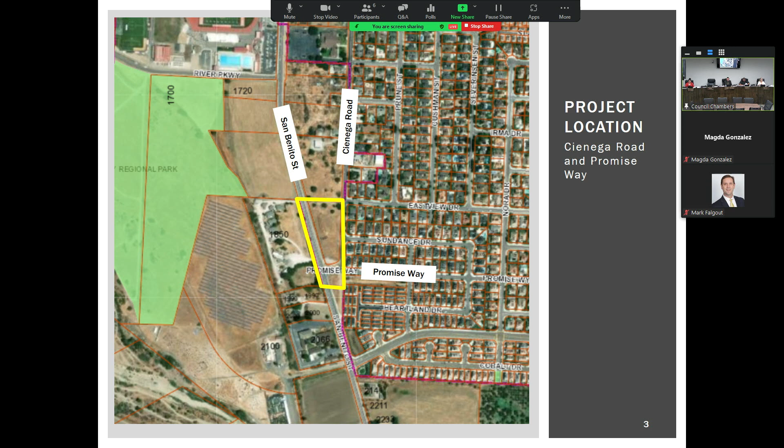To give you a little bit of background, this project has been under review for quite some time. On July 26, 2022, the applicant did submit an application for review. What happens when an applicant submits their application is that the planning division then routes it to everyone within the development review committee. We meet with the development review committee and gather everyone's comments.

There could be design comments at this point in an initial review, though probably not because we're missing some information. But what we do is wrap together what we have and distribute it to the applicant as one complete package. We did that on August 24th. As required by the Permit Streamlining Act, we are required to give them a list of everything they need to give us within that 30-day period for completeness.

The applicant then resubmitted in September. We then sent them comments in October. The applicant then submitted on June 8th and it was deemed complete. And the way that the Permit Streamlining Act works and the way that the Subdivision Map Act works is that once a project is deemed complete, we then have to move the project forward.

We had to make a CEQA determination within 30 days of completeness. That was done. And then once that determination is made, the Subdivision Map Act requires us to bring the project before the decision-making body, in this case, the Planning Commission, for a decision on the project. So that's how we kind of got where we are tonight.

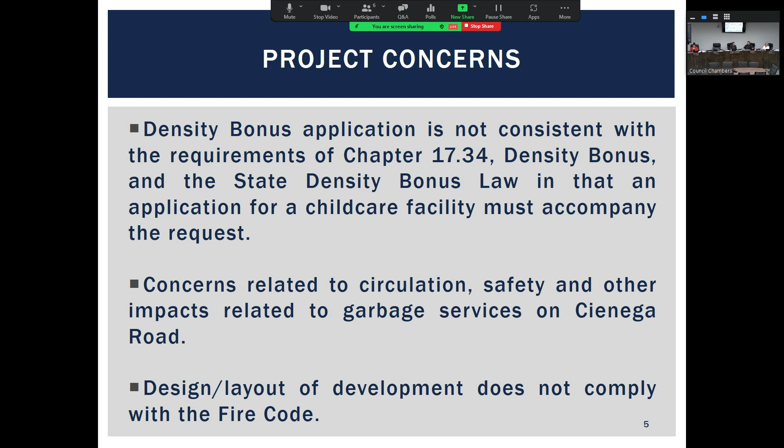The way that the Housing Accountability Act works is that staff and a city is limited on ways in which you can deny a residential development. Back in the day, you could deny it because the design wasn't attractive enough or whatever reason you had, but now it's very specific. It has to be due to safety or it doesn't meet the code.

With regards to the density bonus, in the last submittal, we had two options submitted. That was because the preferred option has always been option A, and that includes a childcare facility, and staff has had comments on that from the beginning. So in the last round, there are two options. I'm going to talk about both of them just so we can fully discuss their project.

As far as the density bonus goes, they're proposing to restrict one unit for very low income, which is 5% of the total number of units. And because of that, they qualify for a density bonus. So as part of that density bonus, they are requesting a waiver of development standards such as setbacks and lot coverage, which they're entitled to. They then get to have a density bonus of units.

And what they're requesting is the maximum, so that's 4 units. And again, that's allowed by the density bonus chapter as well as state density bonus law, so they are entitled to that. So that increases their density on the site up to 22 units. And then they're eligible for the parking requirements under the density bonus.

With regards to option B, it meets all the requirements of the state density bonus law and our chapter 17.34, so there's no density bonus concerns with option B. It meets all the requirements.

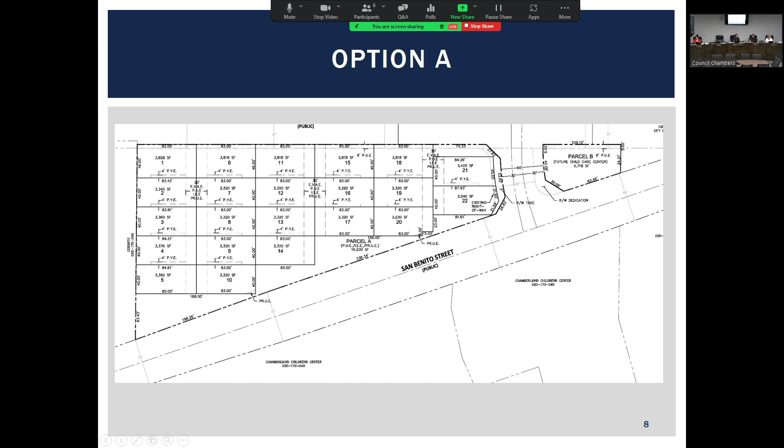Option A, however, then changes things. Option B has 22 lots for residential, and what happens is lot 21 becomes a larger lot, and this kind of remainder lot becomes another house. Option A then changes it so all 22 are located within this area, and then a child care facility, or a future childcare facility, is proposed on parcel B.

The concern that staff has with that is that both the density bonus law and chapter 17.34 are very specific on what needs to occur for a density bonus for a childcare facility. The bonus allowed is either related to the floor area or square footage of the childcare facility. So if you had a high rise, let's say, and 5,000 square feet is going to be a childcare facility, they get an extra 5,000 square feet as their density bonus if they wanted. Or they can have an additional incentive that contributes significantly to the economic feasibility of the construction of the facility. So the bonus that they're requesting has to be tied to the construction of that childcare facility.

As part of this density bonus, the applicant is requesting a waiver of the annexation fees for all the units, which is currently $13,500 per unit. The fee doesn't get paid until building permits are issued, so that fee will likely go up, but it would be a fee that the city would then pay on their behalf to the county.

As noted many times to the applicant, we are requiring a site and architectural review for the childcare facility. That's how we can first make sure the incentive they're requesting is related to construction of the facility, and also make sure a facility could be constructed on the parcel. Our code requires that if you request a density bonus for a childcare facility, you apply for a site and architectural review and conditional use permit. It's in the code.

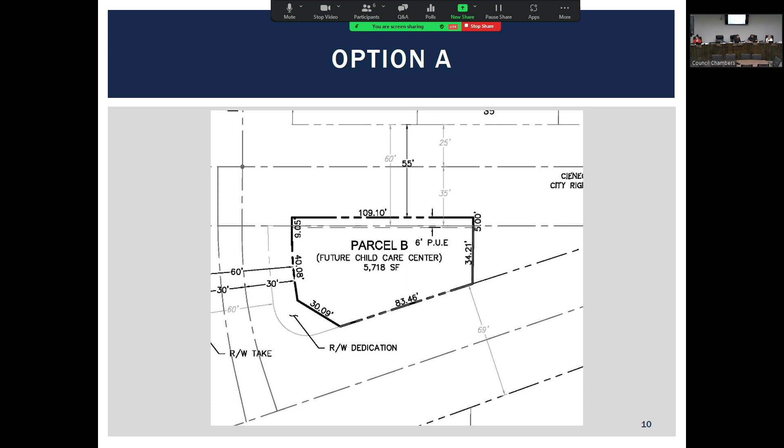As far as garbage service goes, this has been a comment from the beginning. Recology informed the city that they could not provide front door service because their trucks cannot back up the distance of the roads. So Recology said they would only serve them on Cienega Road, meaning every house has to take their can out to Cienega Road.

Every dwelling unit is required to have 3 waste receptacles now: trash, recycling, and organics. So at a minimum, there will be 66 cans on Cienega.

Now, if there's a JADU and an ADU on the site, there will likely be more cans, because you are likely going to require the person in the ADU or JADU to have their own trash service. If that were to occur, we would have a total of 198 cans on Cienega.

Each house with only 3 cans would require a minimum of 11 feet on Cienega Road if they perfectly place their cans.

Due to the layout of the roads, making sure that sight distance is maintained so people entering and exiting the development can adequately see onto Cienega to make an exit, and then the corner, there's likely only 6 feet available per house on Cienega. The larger concern is that it requires perfect can placement even with 3 cans per house.

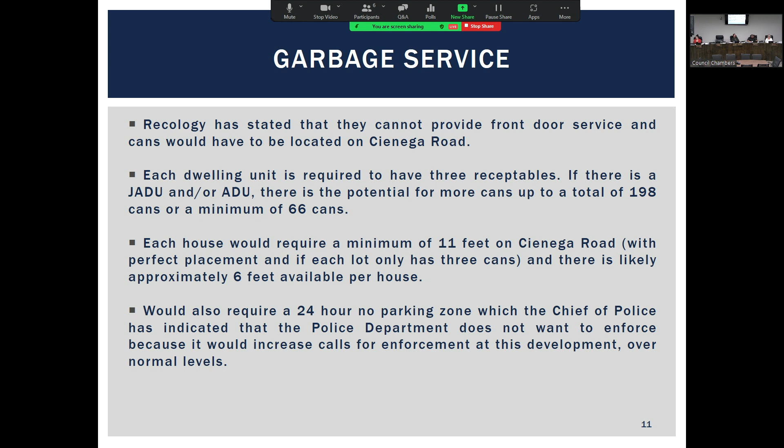Since the beginning, this has been a major concern for staff because of the likelihood that people are not going to place it perfectly. We're going to impede circulation in the area. And then, not necessarily a safety concern but expressed from the beginning, is that if you are in one of these lower lots, let's say 4, 9, 5, or 10, and you bought the house when you were younger and now you're older or have mobility issues, you have to take a can all the way to Cienega and find space for it. And it's 3 cans, you're going out 3 times.

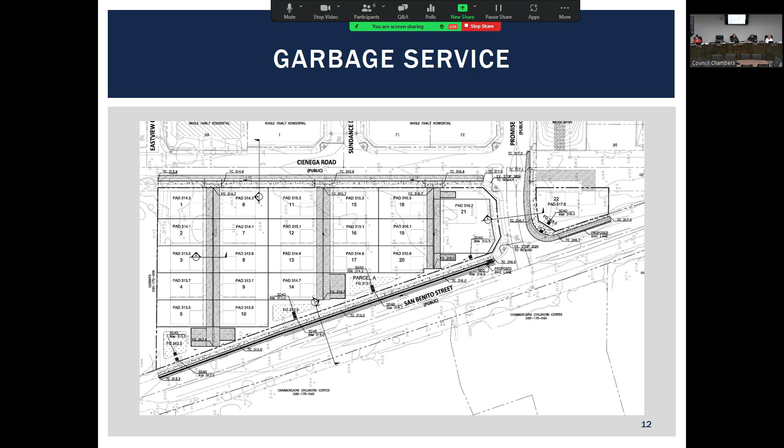So that is a concern we have just as far as allowing people to age in place or people with mobility issues. What happens 20, 30 years down the road if the layout is the way it is with the cans on Cienega?

The biggest concern that staff has is in regards to life safety. The fire marshal determined that the project does not comply with the fire code. The fire trucks cannot travel down those roads. So the fire truck cannot travel down this road and then back all the way up. So the fire truck will have to park on Cienega.

The fire code requires fire apparatus roads to be located within 150 feet of all sides of the structure. So what that means is the fire truck will park on Cienega, and then there are a number of houses where the 150 feet rule is not met.

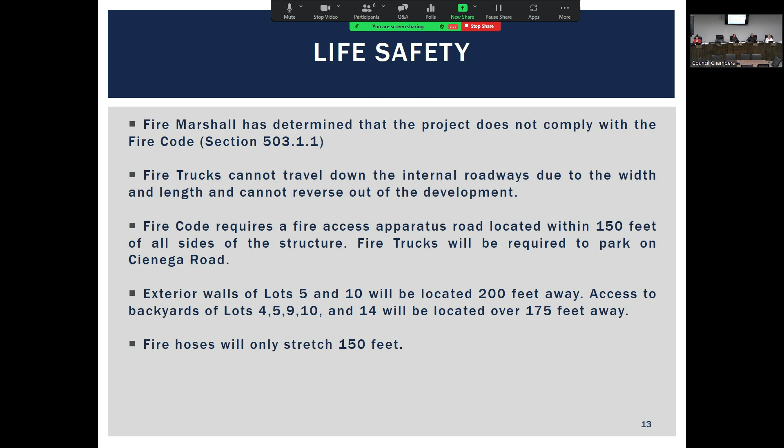So for example, if the fire truck parks on Cienega, these houses, all sides of the structure would be further than 150 feet away. Because there will be cars, potentially trash cans, potentially both on Cienega, it's likely that we'll also have an issue with these houses as well because the fire truck will have to be parked further away.

I am not the expert on fire code, so Charlie Bedoya, our fire marshal, is here tonight and he will go over the fire code from the fire marshal perspective. I'm going to switch, Chief Bedoya has a presentation as well.

Thank you, Commission and Mr. Chair, for having me. My name is Charlie Bedoya, and I am the Fire Marshal with Hollister Fire Department. Thank you for having me here tonight. And it's not just about fire hose, it's about actually fire apparatus access. I have a quick little presentation. What do I press? The right arrow? Okay.

So this is straight out of the fire code, section 104, duties and powers of the fire code official. 104.1 general: the fire code official is hereby authorized to enforce the provisions of this code. The fire code official shall have the authority to render interpretations of this code and to adopt policies, procedures, rules, and regulations in order to clarify the application of its provisions. Such interpretations, policies, procedures, rules, and regulations shall be in compliance with the intent and purpose of this code, and shall not have the effect of waiving requirements specifically provided for in this code.

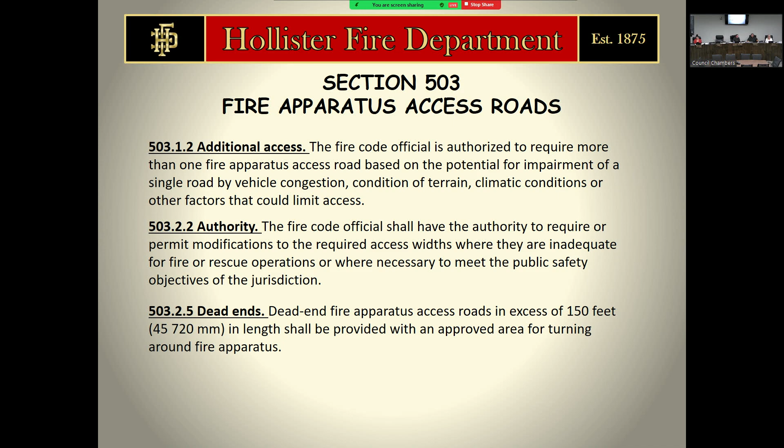So those are some examples of what we can have for proper turnarounds. You see the cul-de-sac, the Y, a hammerhead. The one on the right, the minimum clearance, that doesn't apply to this because that's for a long driveway where you kind of have a turnout through there. But you can also have an alley dockway also if we wanted to.

Section D103, minimum specifications, access road width with the hydrant. This is just good information to have out there. Where a fire hydrant is located on a fire apparatus road, the minimum road width shall be 26 feet. So a fire access road is normally 20 feet, but anytime you put a fire hydrant on the road, you have to expand it out to 26 feet wider. It took me a few years to catch that, but I finally got it and understood it after being here for a little bit.

Dead end fire apparatus roads in excess of 150 feet shall be provided with width and turnaround provisions in accordance with Table D103.4. So if you look, if you have 0 to 150, if you're less than 150, it has to be 20 feet wide. That's excluding a fire hydrant. So are there any turnarounds required? Absolutely not.

151 to 500 feet requires 20 feet wide roads. You could have a 120-foot hammerhead, the Y, or any of those configurations to be able to give us the proper turnaround for the fire apparatus.

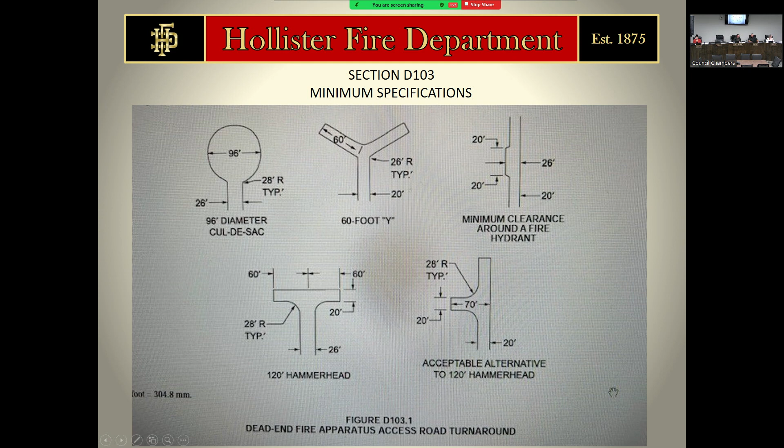Then you get into the 501 to 750 range, it gets into 26 feet wide, and over 750, we have to figure out something else, probably a second access or a third access.

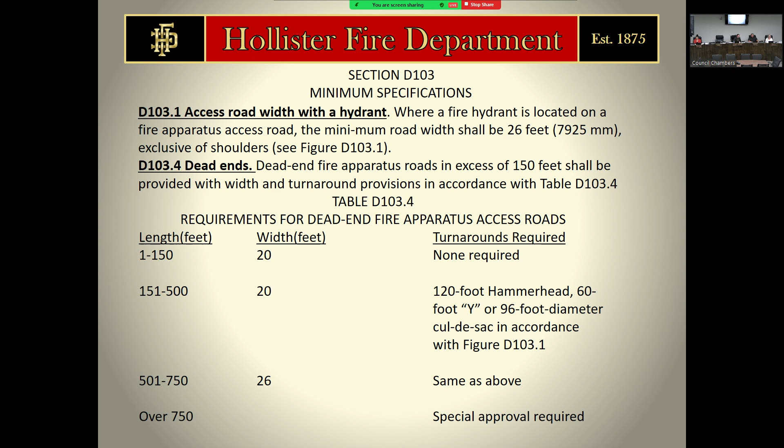You have to understand, on those fire apparatus roads, you have to put up signs, either paint the curbs red saying fire lane no access, because at 20 to 26 feet, you can't have parking on both sides of the roadway.

And if you have roads 26 feet to 32 feet, you could only have parking on one side of the roadway. So these developments usually can't have parking on any parts of the roadway, which would impair fire apparatus and even the garbage trucks too. I'm more concerned about the fire apparatus. But wider than 32 feet, then parking is allowed on both sides.

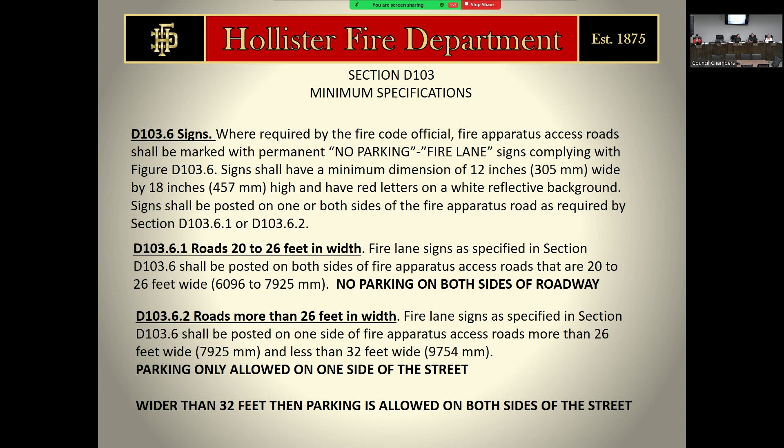So with that, I did some investigations on developments we've had in town. Heartland is one of the developments across from the Presbyterian Church on Cienega Road. I was told Heartland doesn't meet it, that Heartland could get away with it.

So I went down to Heartland, and if you look at Heartland where the T is in the middle, you see how it tees off? I went to one of the driveways that went down there. The streets are 20 feet wide, but they're only 144 feet in length. So does that require a turnaround? No, it doesn't. It meets the code.

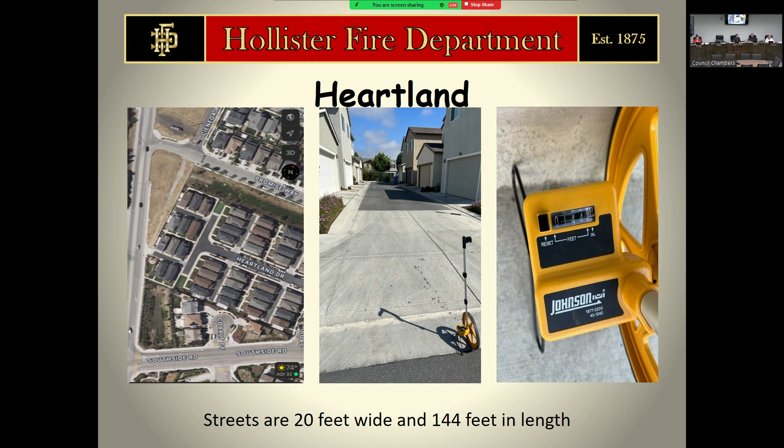I showed the measurement right on that part right there. Also in Heartland, you see the hammerhead or the T all the way over there. I measured from the middle of the T to the end of it. It's 115 feet one way and 115 feet the other way.

But if you look, it's red on both sides of the curb too, because it doesn't meet over that 32 feet or 26 feet in width. So that whole T is red, fire lane, no access. That gives us a proper turnaround to be able to pull in, back up, and turn around where we need to go.

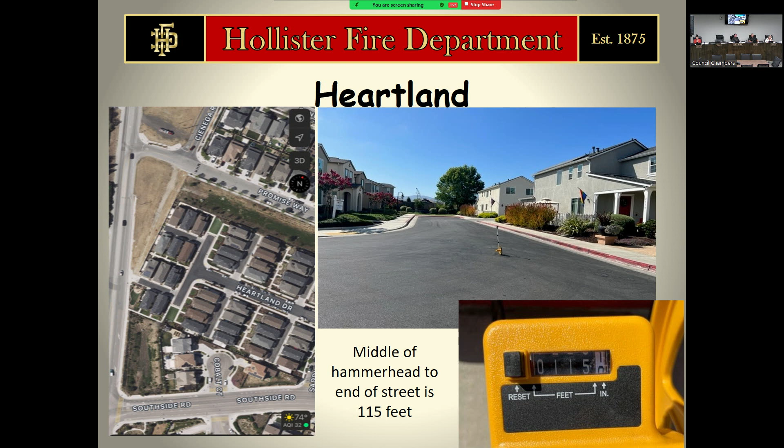KB Homes, west of Fairview, is a development getting built right now. If you look at the middle picture, they have these mini developments with like 3 or 4 homes that go down there. The farthest it goes back from the street is 140 feet to a mini hammerhead. So that doesn't require a turnaround in there.

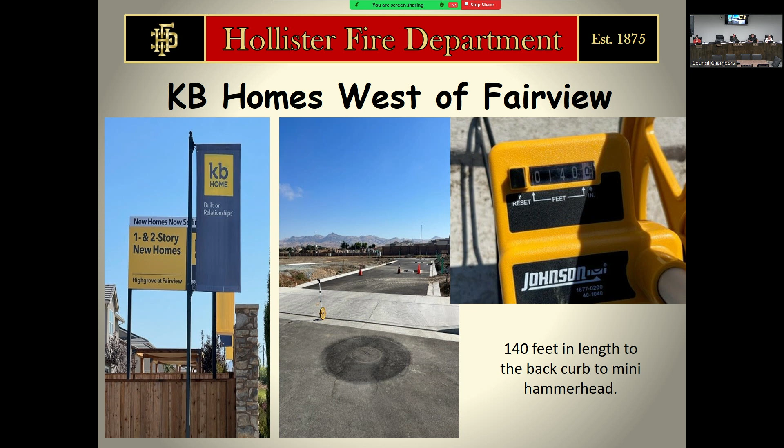But in that back little hammerhead, it goes back 40 feet for a total of 80 feet in both directions. So at 40 feet, yeah, we could get a fire engine back there, back it up, and turn around. Their widths without a fire hydrant are 26 feet wide, which gives us a little more playroom to move around.

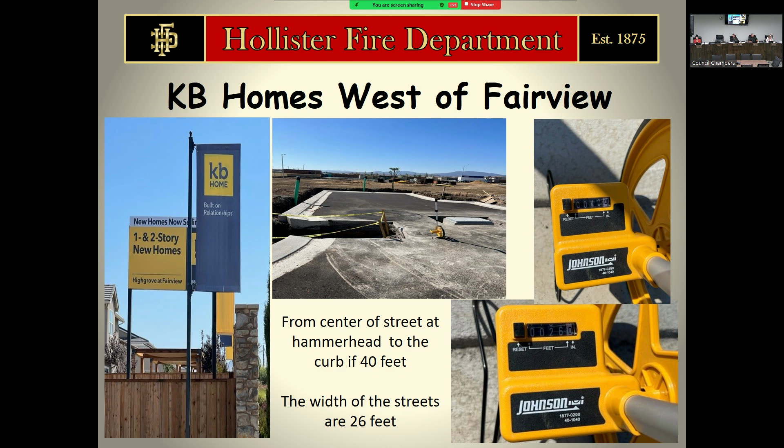Allendale, here's a good one, north of Park Hill. If you look over on Allendale, right under Shearwater Street, you see that little U right underneath there? This is a perfect example, it's Egret Lane and Raven Street.

I started in the beginning of the street in that left-hand picture and walked 150 feet. On that second picture, that's 150 feet where I walked to. I continued out a little farther to the end of it, and it was 203 feet to the end. So yes, our hose can meet it, but it doesn't meet the turnaround standards. It's past 150 feet, so we have to have a turnaround.

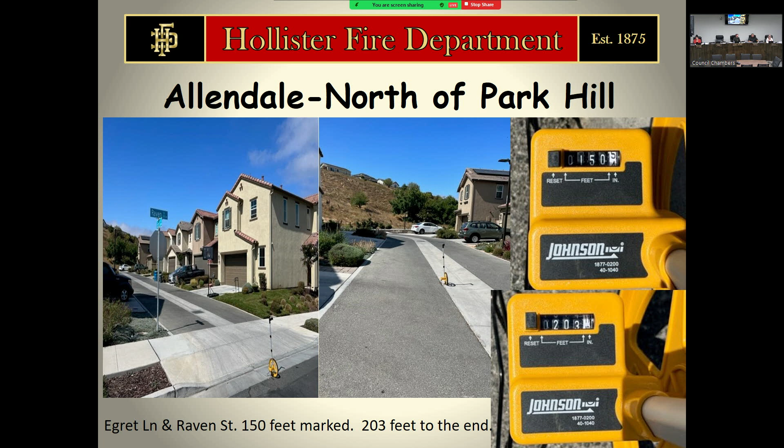So what they have is it drives around in that big U through the other side of the development. If you look right here on this next one, here's the second part of the street where the U's out, and from the beginning of the street to the back of that U, it's 196 feet. You see where it kind of U's out.

But in addition to that, the proper turnaround and the U that continuously goes through there, they have a 12-foot fire supplemental access fire road behind the homes also in addition. So they went above and beyond and added some extra access for us if needed.

So all this is per the adopted 2022 California Code of Regulations, Title 24, Part 9. Any questions?

I was curious about the 150-foot rule. I'm trying to understand the principle of that. Is it that if a fire truck has to back more than 150 feet, there's just more risk of an accident? Killing people, firefighters, people get run over. They have backup cameras, but it's still, if we need to move out of there in haste because we're on duty 24/7, we might have to clear a call.

If we're having to back out, we have to have people out on both sides, backing up slowly and guiding them all the way out. Where if we have the turnaround, we could go forward, turn around, and drive right out without having to put people's lives in danger.

Okay, thank you. Any other questions for the fire marshal? Well, you do run the risk of having fire really close to your fire truck when you go in there. If you had multiple structures, that could get tricky. You got to understand, we want to be able to pull up as close as we can to the fire. We do care about the fire engine, but we also care about the exposures and life safety, about it extending to firemen or somebody else's property. So we want to put ourselves in between the fire and the other exposures.

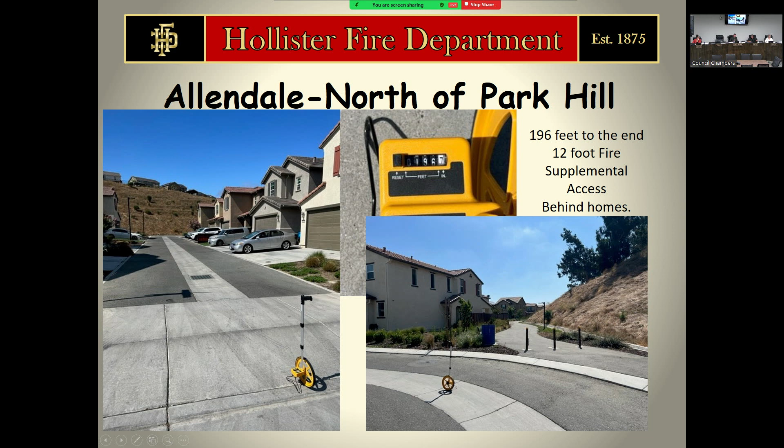Following the completeness determination, staff is required for all projects to decide whether further environmental review is required under the California Environmental Quality Act. In this case, due to the concerns on Cienega and the fact that the fire marshal has not approved the project and has indicated it does not meet the fire code, staff identified the potential for significant impacts related to the development. Because of that, to fully study it, a negative declaration or environmental impact report would be required. Those are very costly to prepare.

So under the California Environmental Quality Act, Section 15270, projects which are disapproved are exempt from CEQA. In this case, where staff is recommending denial at this point, no further environmental review would be required. But if it were to move forward as is, some level of CEQA review would be required.

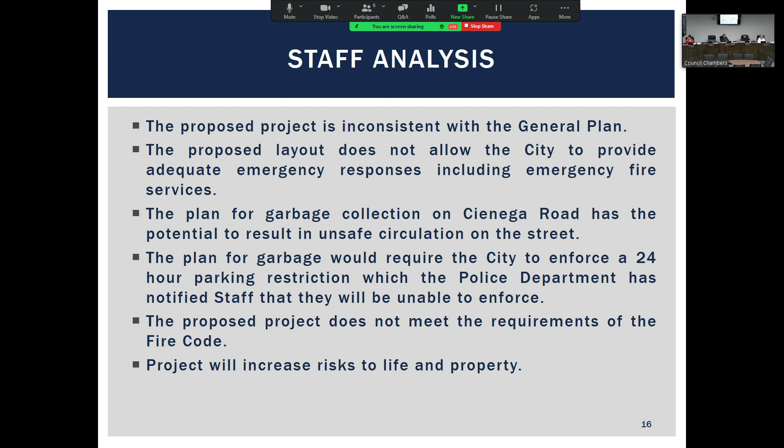Staff has prepared a resolution. The city attorney has looked at it, and all the findings are in there for denial of this project. We are recommending that you adopt a resolution denying the tentative map and the density bonus. You could also choose to continue the hearing and provide direction to staff if you chose to do so. I would be happy to answer any questions you have. That concludes my presentation.

Okay, any questions for staff regarding the presentation, withholding any comments until after the public hearing? Just any questions? I have one, Mr. Chair. Okay, go ahead. Can you bring up the slide that shows which lots were affected?

For sure, it's lots 4, 5, 9, 10, 14, potentially 3, 8, 13. It just depends on where the fire truck ends up being located, where you get further and further away from being able to get to that. With this development, it's a little harder to see on this map, but there is no parking in this internal roadway. They each have a 2-car garage, so they'll be parking in the 2-car garage. Then there's some parking at the end of the street, but most of the parking will be on Cienega Road, especially if there's an ADU. We're going to have a number of cars, so Cienega Road will have a number of cars. Where a fire truck parks is wherever it's going to fit.

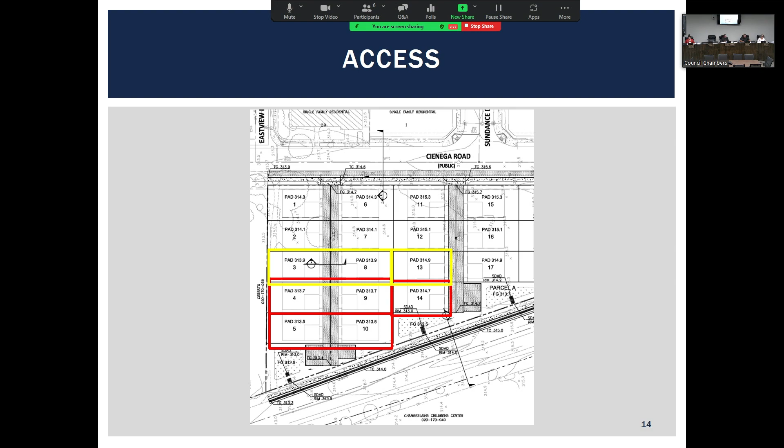Christine, go ahead. I just wanted to add, with the options for tonight, that staff is recommending option 1, adopting a resolution for denial. If the commission decides to continue this item, our subdivision ordinance requires an agreement between the commission and the applicant to waive the 50-day requirement for the commission to take action, with mutual agreement. But that's an agreement between the commission and the applicant if you choose to continue it.

Okay, thank you. Commissioner Lenore, you had a comment? Yeah, now I forgot what it was. I mean, a question, not a comment. It'll just keep going. Shoot.

Without seeing any design, I can't determine if there's driveways or not. So it's single family residential. Two-car garage. Is there parking out in front of the driveway? And then, how do I know if the driveway's front or back? I have no way of knowing without more information, as you stated. It's just a tentative map. We don't require site and architectural review.

Well, I don't know the lot coverages. I don't know anything. It is part of the density bonus. But it didn't specifically say what the lot coverage was going to be. I'm getting the feeling it's like 60%. It's 60%, it said that, right? That's with the ADU or without the ADU? Well, the ADU can be part of the house, right? The JADU can be part of the house. But the ADU, unfortunately, in this case, we can't require parking for it. I'm concerned with lot coverage, and I know we have the right to say something about lot coverage. Not under density bonus. Okay, that's why I don't like it.

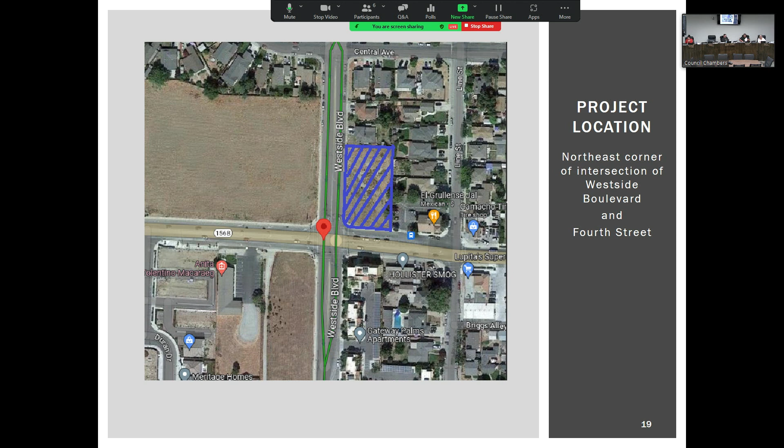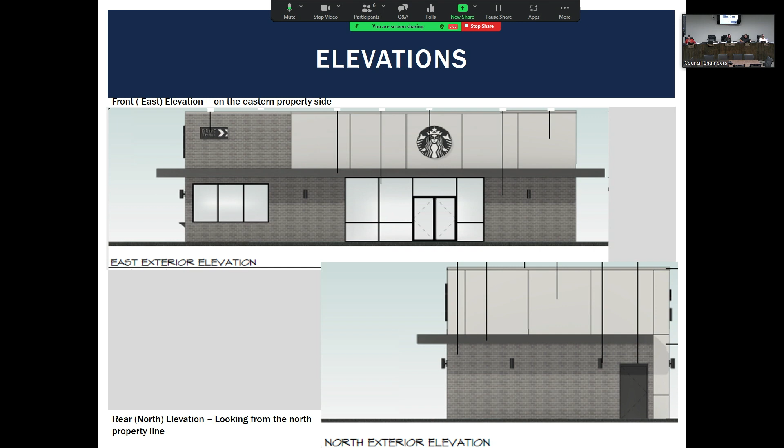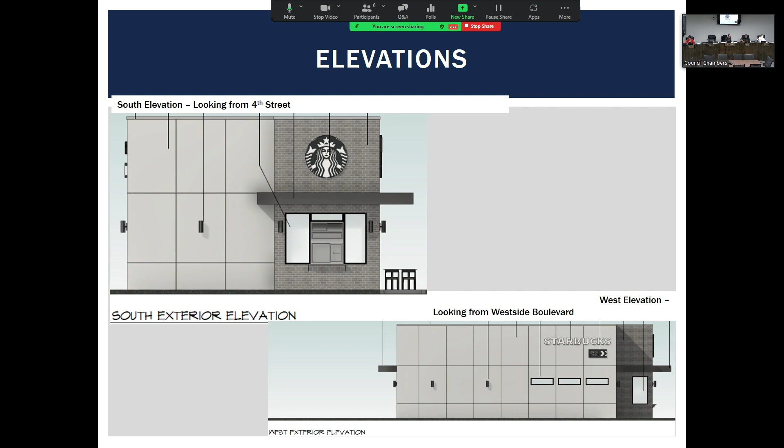Next, upon reviewing the proposed site plan, staff identified certain concerns specifically related to pedestrian orientation and safety.

But staff feels that it hasn't completely addressed the concerns. It also does not locate the building at the street frontage, which is one of the requirements by the municipal code, and it doesn't locate the parking lot at the rear of the building, which is another concern and recommendation in the code.

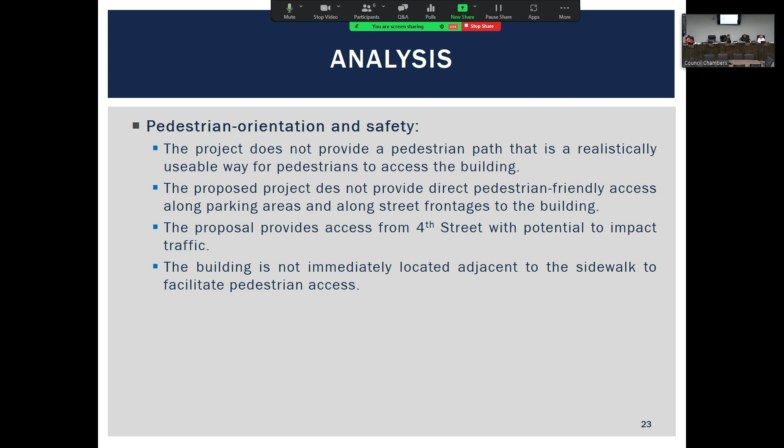Engineering did express some concerns, and we do have engineering here on the call to address those. Recology said that they would opt for option B, as that was a more feasible option than option A. And the fire department indicated that they also didn't have any concerns with option B.

The main concern is that there are still issues when it comes to queuing. We would be eliminating the previously proposed entrance off of 4th Street and just limiting access to Westside Boulevard, which has the potential to create queuing and perhaps some issues with Recology and their trucks entering the site. So we are asking for your suggestions and recommendations as to how to proceed with this design.

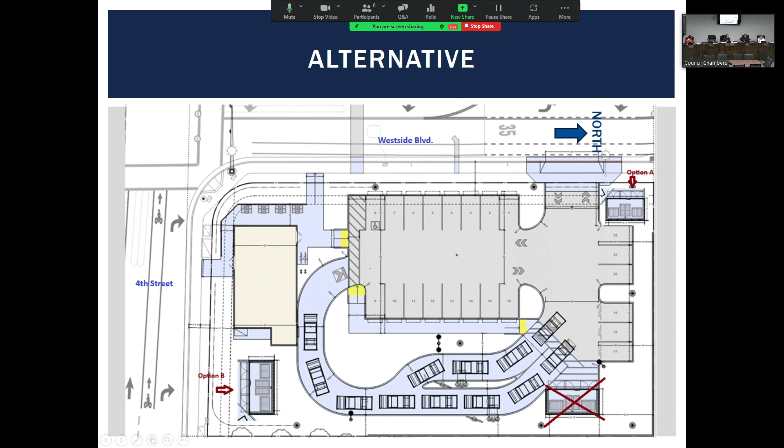The applicant has also provided a presentation with different options, and they will present that after I've completed my presentation. Next slide, please.

Like I previously mentioned, we feel that this one addresses a lot of the concerns we previously identified when it comes to pedestrian safety and building orientation. I've outlined some of the items we identified and provided to the applicant that we feel have been addressed, although there are still concerns when it comes to queuing and access to the parcel.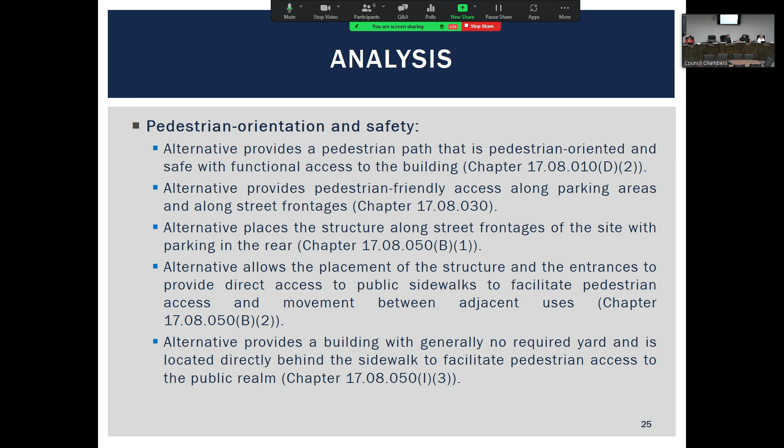Next slide, please. As I previously mentioned, we are here for you to ask any questions and provide any feedback related to the design. I think once the applicant provides their presentation, you'll be able to see the different options and why they wouldn't work, and why we feel that this one has more potential than what they had originally proposed. That completes my presentation.

Okay, so we have the applicant team here. Give me one moment while we pull up their presentation with some alternatives they've been working through with staff to try and address some of the issues. Because the site is so constrained, we're kind of running into one issue or another. So that's really why we wanted to have this study session with the Planning Commission, to get some feedback before bringing this item for public hearing.

Oh, you put it in there. Okay, sorry. Their presentation didn't get on the network, but we are getting it.

Well, while we wait for that...

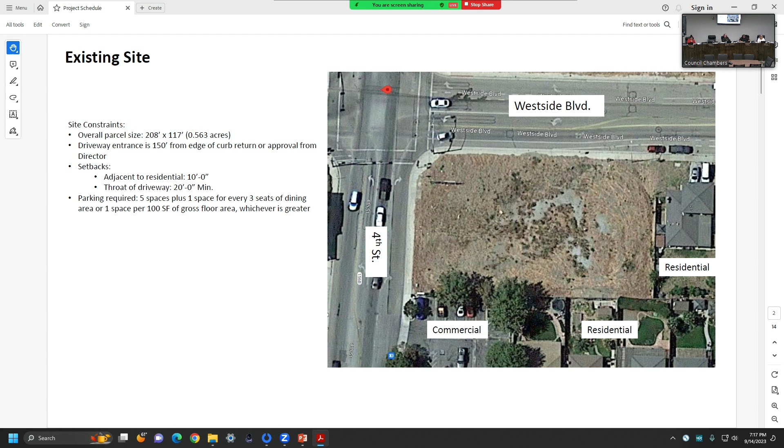So here is our initial submittal, lacking in a few things. We received feedback from staff and resubmitted. In this one, we modified the trash enclosure and made a couple of small modifications at staff's request and Public Works' request.

In this next one, we had a parking issue. I'm Callie Huff, part of the applicant team and also part of the ownership. In the previous submittal, we asked for a deviation for the parking calcs. In this next slide, we shrunk the building because we weren't able to get the parking calc deviation, so the building footprint becomes about 1,500 square feet, and then we make the 21-stall calc.

In this next slide, we modified things further. This one we only had one access on 4th Street, which is entrance only, and modified the exit of the drive-through to steer cars back onto Westside to prevent them from going out on 4th Street. We also added a median to prevent anyone going southbound on 4th Street from turning left into the site. This next one is just a minor modification of restriping Westside.

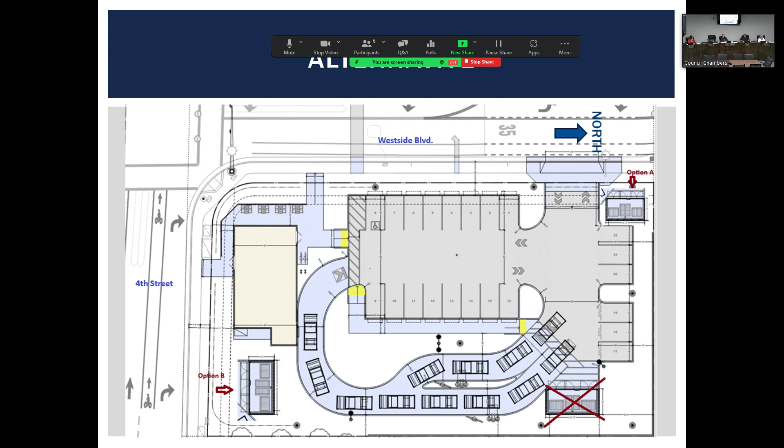As has been discussed, Public Works on both teams has talked through circulation and the improvements required on Fourth in order to allow that drive-through access as currently designed in the most recent submittal. So there's enough separation between the driveways per the engineering code, Public Works code.

Well, so this is new — this is just a trash pickup. So if you go to the preferred option... I've got to switch, I'll scroll back, we'll go off this one for now. Yeah, that's close. That was the first thing that we did, was determine exactly where that driveway could go.

Okay, and then from there we started to work on the design. And that's right-in only, so there's no exit off of it, obviously. It's legal, or they wouldn't have passed it. Correct, yeah — it's pretty close though, is what I'm saying. It's quite close, both to the intersection and to the other driveway.

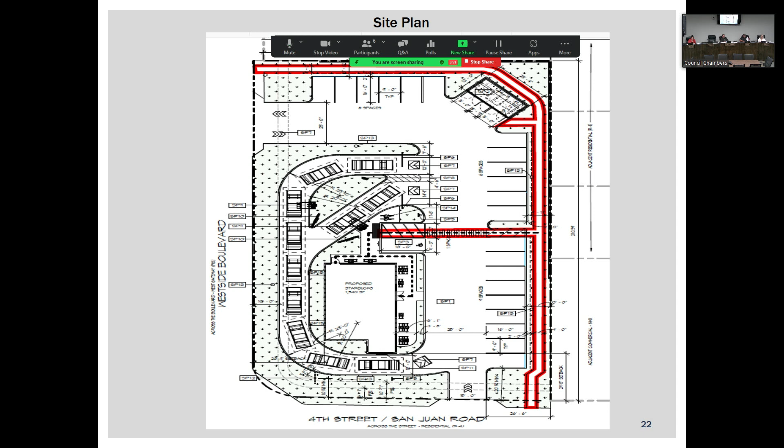I had a question about option 2. You mentioned there could be a potential issue of cars getting landlocked in the parking lot because of too many cars in the drive-through lane. Is there any reason why the end of the drive-through lane curves back into the parking lot? Isn't there any reason why you couldn't just have an option for the cars to go forward, with kind of a second driveway, so cars could exit straight after pickup?

Right there, it's too close to the intersection — too close to the corner. Okay, thank you. Those two drive locations are the only things that are fixed and work. Okay, yeah, got it. Thank you.

Yeah, there's a few things we could tweak and maybe add another one or two on this. Our goal tonight is to come away with something we could work on. We've had 20 plus, we're a couple years into this, we're looking for direction. Operationally, we think ours operates the best and will minimize any problems later on down the road.

That's just our experience. We think we satisfy the planning requirements. This enhances, I think, what the planning obligations are about being on the street, a little better pedestrian access. So we have public works on one side and we have planning on the other.

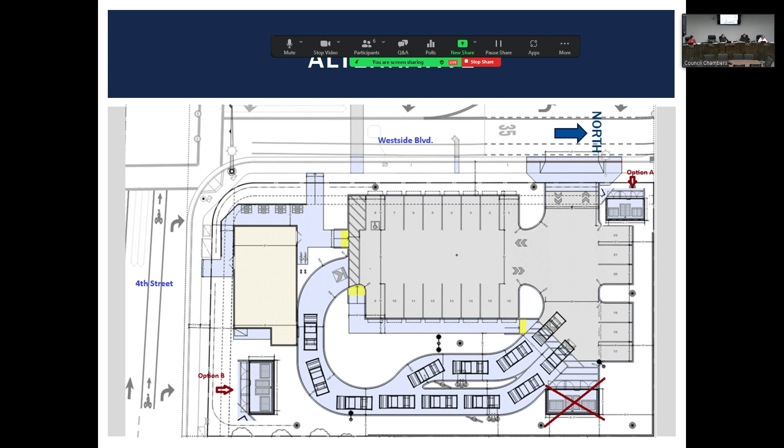Yeah, it's popular. So that's why I'm just reiterating, with focus on basically what is most important to the Planning Commission. If we have to modify anything that is within the requirements for this particular district, those findings will need to be made. Right now this is closest to the findings of what planning can make, but there may be some wiggle room that we're going to have to consider. So that's what we'd like to hear from you in this case.

And just to clarify, we did do a queuing study, and these satisfy our queuing study. We also do, I don't even know if it's required or not, a parking management plan—the queuing study dictates how many cars we need, but the plan addresses what happens in the event we start to breach: what do our associates do, how do they go out and manage it. So we have that plan that we use internally, whether it's required or not, that's just the way it operates.

I have some questions. So on 4th Street, it can only be an in. Correct, okay. Could we—I see that chapter 17.08.050 F4 talks about pedestrian linkages between buildings and uses, shall include features such as walkways, corner entrances, paseos, outdoor patios, water features, benches, and tangible public art in mixed-use developments. Because the drive-through seems to be quite a concern.

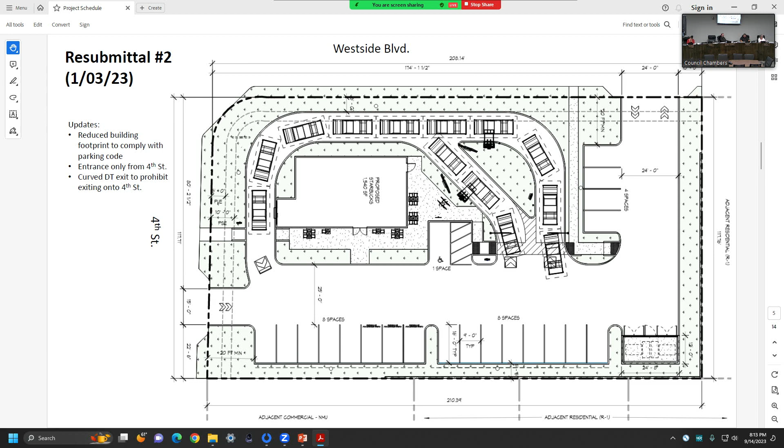They're probably going to take this path or this angle. So there have been alternatives for where the pedestrian path enters from both the Westside and 4th, proposed by the applicant. If the Planning Commission has discussion on where that might be best, we can merge plans and thoughts. This has been the preferred option, giving the most direct, obvious path, because if you tell a pedestrian to walk all the way around, they're not going to do that. That was staff's concern - yes, we're providing a sidewalk, that's great, but are they going to use it?

Then we have the second option of the pedestrian access on 4th, which is a little more direct. So we've looked at a really direct path, a mid-direct path but again crossing the drive-through lane, and the most indirect path as options we've looked at with the applicant. We'd expect that the 4th Street pedestrian access would be the more popular of the two.

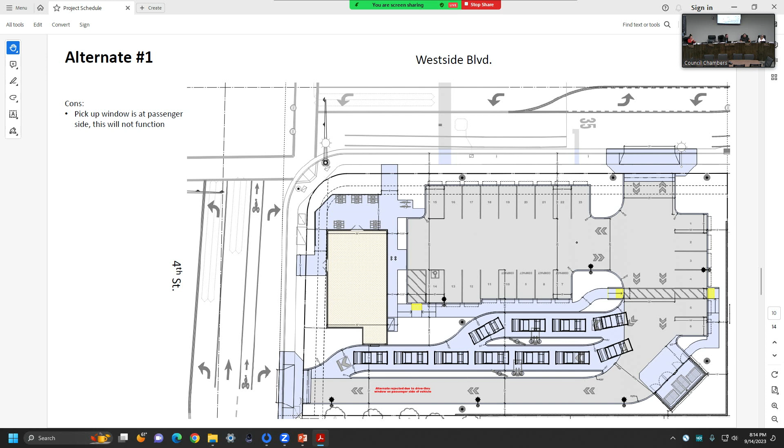I have a question I never asked in the meetings we've had, and I'll have to check other sites. Are there any local examples where pedestrian access goes from the public right-of-way through across the drive-through? On San Felipe, in Sunset, walking from the bank to Papa Murphy's, you walk through the drive-through. It might be worth staff looking at that, and even if the Planning Commission wanted to take a look as well, to see what it feels like.

I'll definitely do that and encourage my staff to do it as we work through these issues. I actually checked that Starbucks crossing as well as across the street. McDonald's has in that parking lot with Ace Hardware, same thing, pedestrian access off their sidewalk where there's a stop sign for the drive-through traffic, wide yellow bump dots that designate they have the right of way to go through.

So it's not uncommon to have them cut through. But what I was going to ask you was on the preferred option, if you go back to that one, if we made parking allowances and were to eliminate the 4 spots on the Westside Boulevard entrance - are you saying the preferred Starbucks option, the preferred option or the alternative? This labeled one as preferred option, okay.

If those 4 spots were eliminated, would that possibly generate up to, I think, another 6 extra vehicles that could possibly queue? And then the win-win situation for more outdoor seating - there's already 2 different pathways. We could then create that into more covered outdoor seating and make it even more.

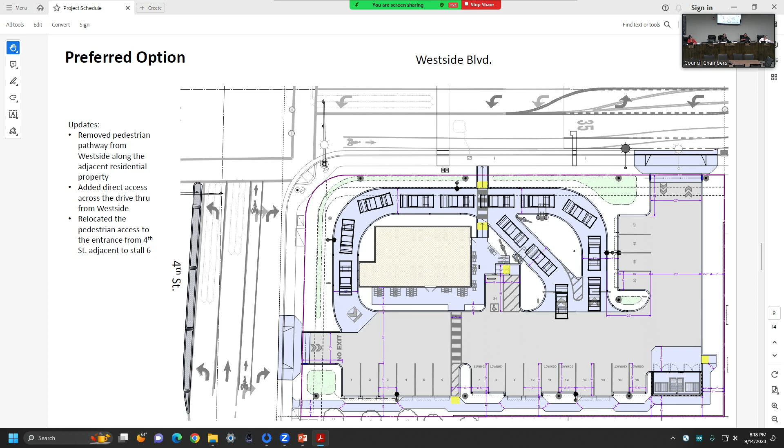We're all just trying to get this right, and we want to be a good member of the community, and operationally, we want it to work, and staff has codes and compliance issues that we're dealing with, so we do want to get it right, and I think we have enough direction here to make some changes and get it in front of even Christie and see if we can be back in front of you shortly.